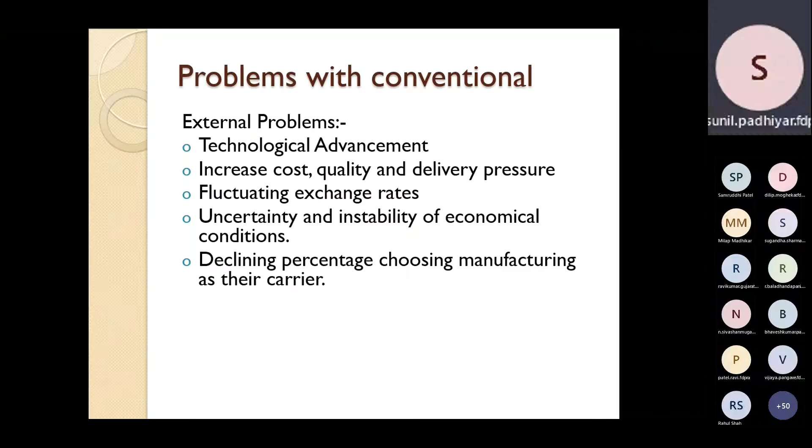Otherwise, no new players are entering. In older days, before 50 or 60 years, you had not heard about Ambani, but he came into the picture, and that number is very big before the 50, 60 years.

Nowadays, you will find a very less number of entrepreneurs or manufacturers. Some internal problems are also there for the conventional manufacturing systems, like the high level of work in process inventories. So inventories will be high, and that will increase the cost, right?

Complex material flow pattern, right? To meet the demand, you have to go for a material flow pattern that is complex. Extremely long lead time - lead time will be higher. Increasing the product complexity - nowadays you require more products, more complex products, having harder materials and complex features. So these are the internal problems for conventional manufacturing.

Excessive material handling and damaged parts - whenever you go for excessive material handling, sometimes it will cause damage to the parts and components also. So that will increase the cost of manufacturing indirectly.

Complex scheduling and machine capacity loading is also there in case of conventional manufacturing processes. Some more are there - low capital asset utilization, aging capital investment, inadequate tooling, unavailable toolings, and out of control scrap and rework cost.

So these are the very large things that create problems, either internally or externally, for the conventional manufacturing system. Now that leads the researchers and manufacturers to think about new technologies.

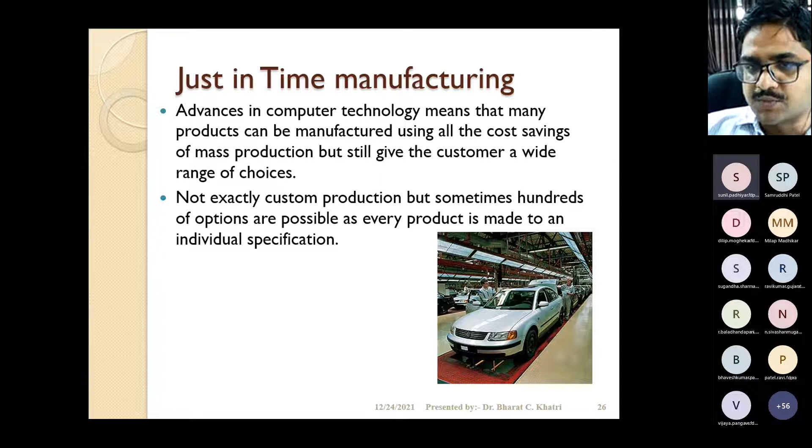So not exactly custom production, but sometimes hundreds of options are possible. Every product is made to individual specifications, and that can be done in the production line or layout within a short time. As the customer will say 'I require this one', this just-in-time manufacturing system will start the manufacturing and provide the product to the customer. So that is a feature of just-in-time manufacturing.

So that is possible without wasting time. You don't require a very large lead time to organize things or to plan things. This technology is capable enough to produce things within a short lead time, right?

And that is possible only due to the shared information system between the manufacturer and individual component and material suppliers, and external supplier partnership. So they will plan in such a way that every inventory, every tooling will be available on the software within a short time.

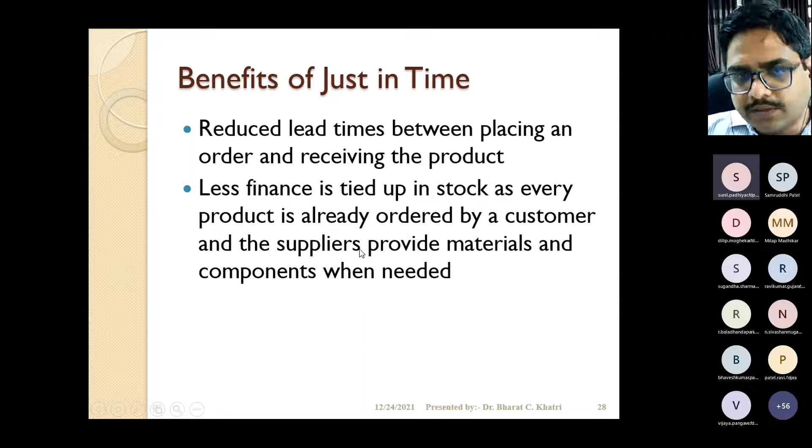Benefit of just-in-time will be very reduced lead times - already we have seen, between placing the order and receiving the product. Less finance is tied up in stocks, so we require very low inventory, as we plan for production after receiving the customer needs. So just-in-time will reduce the inventory also.

Second one is lean manufacturing - that is also a new technology. It is an initiative focused on eliminating all waste in the manufacturing process, resulting in a more competitive and profitable position in the industry.

Lean manufacturing is focused on how we can reduce or eliminate waste, either during product design or manufacturing the product. That depends on reducing human effort, less stock, less time to develop the product, and less space to make that product. So here everything will be customized, everything will be optimized, and we try to reduce all these things, right?

So what are the inputs you are using for making a product that are used in this lean manufacturing system? So that will become more efficient and economical.

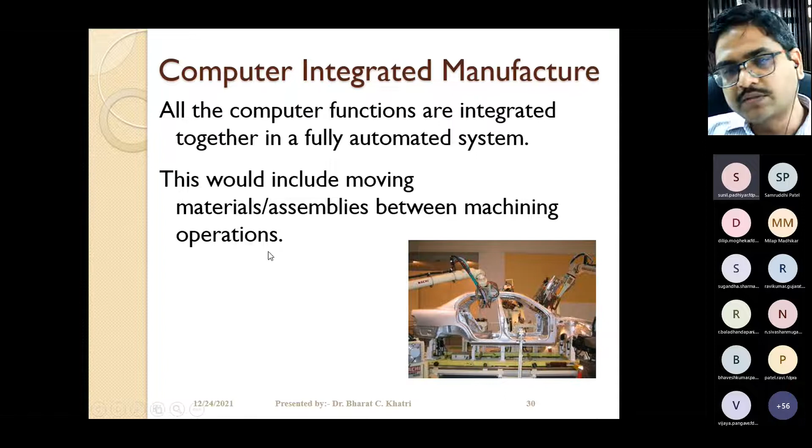Third one, that is computer integrated manufacturing, or CIM. As discussed earlier, this CIM platform will group and coordinate the CAD computer-aided design features, computer-aided manufacturing features, and computer-aided process planning features. All platforms come on a single plane, expediting the work and providing you the best product. This also involves moving material and assembly between machining operations, which this plan also focuses on, so that everything is fully automated.

The next aspect is green manufacturing. Here we not only minimize waste but also minimize pollution, so this aspect is more concerned about pollution, achieved through product and process design. So how we can design such a product or process that creates very little pollution. This is a philosophy rather than an adopted process or standard. It is a philosophy, and some manufacturers are supporting this as well.

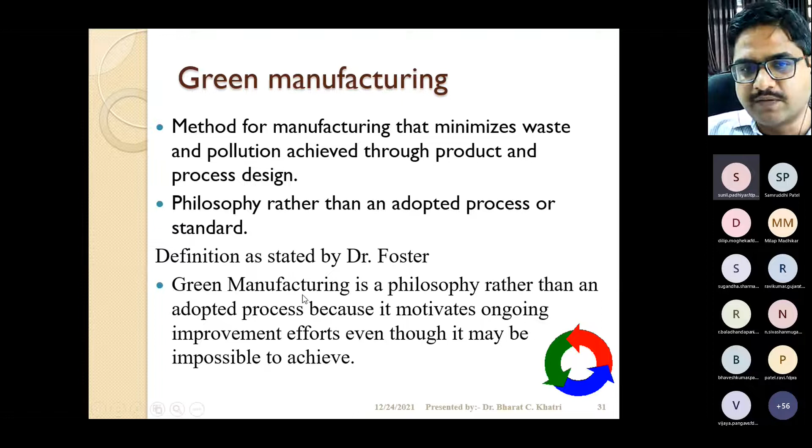Its definition is given by Dr. Foster: green manufacturing is a philosophy rather than an adopted process, because it motivates ongoing improvement even though it may be impossible to achieve. This is the definition given for green manufacturing by Dr. Foster. Now, today's discussion is on the flexible manufacturing system.

What is a flexible manufacturing system? You can say it is a reprogrammable manufacturing system capable of producing a variety of products automatically. The key point is that it is reprogrammable, so it is not a fixed program; you can reprogram the manufacturing system to be capable of producing a variety of products. The second thing is that a variety of products can be produced, and the third important thing is that it is automatic. So here we have reprogrammable, variety of products, and automatic. This allows for reprogramming of products as well as automation.

Conventional manufacturing systems have some limitations, as we already discussed: either you go for less quantity but at high cost, or you go for large quantity but it is not flexible for different types of components. All these limitations can be covered by the FMS system. FMS is designed to provide both of these features; you can go for medium volume in FMS very easily, getting a variety of products along with the quantity.

So why do we need flexibility in the manufacturing system? The reason is variety in products gives more options for customers. You can produce a number of products, giving better options for consumers, and you will get more customers. It also helps in optimizing manufacturing cycle times, reducing production cost, and overcoming internal changes like failures, breakdowns, and limited resources. These can all be overcome with the flexible manufacturing system. External changes, such as changes in product design and production system, are very easily met by the FMS, flexible manufacturing system.

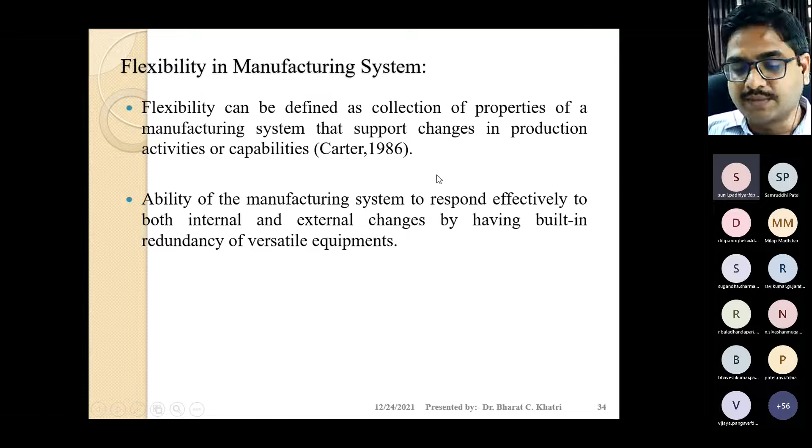Regarding the history of FMS, it started in 1960 in England by David Williamson. He thought in terms of a flexible manufacturing system by making the system called System 24. So he gave the name System 24, not FMS, but introduced it as System 24. He designed such a flexible manufacturing system that could operate without a human operator 24 hours a day under computer control. In 1960, he used CNC machines, NC machines, and computers to start that system and run it 24/7. At that time, he introduced the terminology FMS.

From the beginning, the emphasis was on automation rather than reorganizing the workflow. So in FMS, the total focus is on automation. Automation is the main purpose in the beginning, so FMS is basically based on automation.

During 1960 to 1970, cost was the primary concern. We all know that at the time the cheaper product was required more. Then later, quality became the priority.

From 1970 to 1990, we focus on quality. We wait for the quality, we wait for the market to get a quality product like a Bajaj scooter. We can wait for the delivery time, large delivery time, but after 1990, people are not that much patient. So after that, the market becomes more and more complex, and speed of delivery becomes the focus point for the customer.

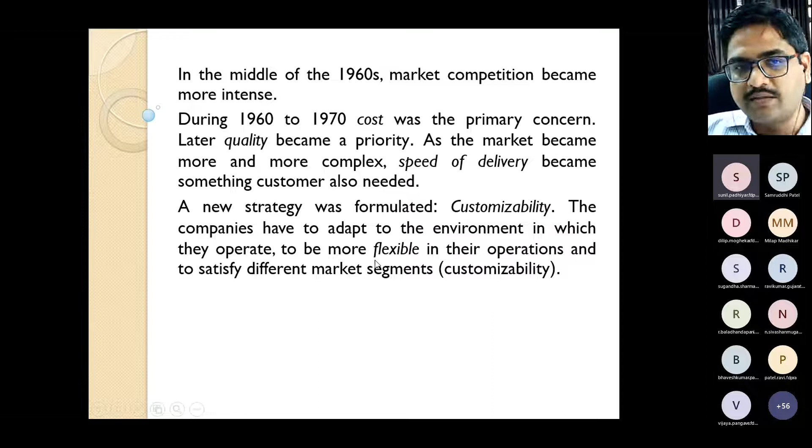So customers are also focused on how much speedy delivery you can do. So a new strategy was formulated: customizability, and companies have to adapt to the environment in which they operate, to be more flexible in their operations and satisfy different market segments. So FMS is a manufacturing technology, you can say.

It is a philosophy also, you can say, and system is a keyword. We have to focus on the system. We have to develop such a system that is flexible. And the buzzword for today's manufacturer is agility.

Agile manufacturer is one who is fastest to the market, operates with the lowest total cost, has the greatest ability to delight its customer. So agility is more of a focus point nowadays, that we require to give the product at low cost in a very delightful manner.

FMS is simply one way that manufacturers are able to achieve this agility.

FMS, as per the US government, the definition for FMS is very simple in that case: a series of automatic machine tools or items of fabrication equipment linked together with an automatic material handling system. So the number of automatic machine tools linked together with an automatic material handling system, and a common digital pre-programmed computer control. So all things like the number of machine tools and the conveyor belts should be connected with the common digital platform. So that will cause the producing of the product very easily. So that is the definition given by the US government.

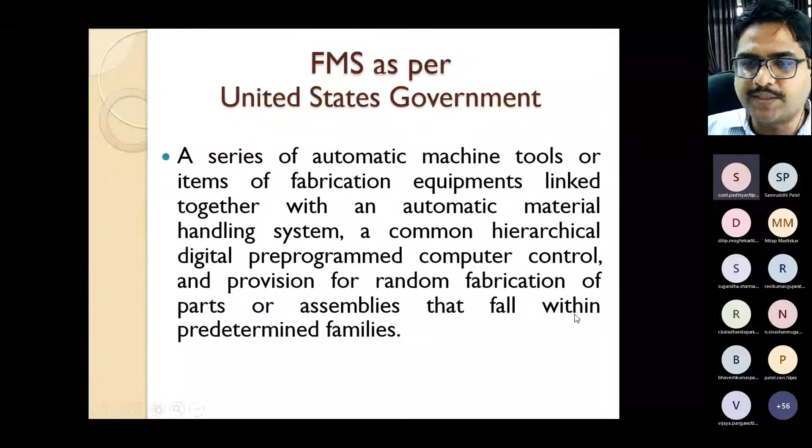Likewise, FMS by Kearney and Trecker: FMS is a group of NC machine tools that can be randomly processed, a group of parts having automated material handling, and a central computer to control dynamically balanced resource utilization, so that the system can adapt automatically to change in the part production mix or level of output. So that will provide the flexibility for changing the part production.

So many definitions are there. Now you can see the layout for the FMS. Here you can see on the top side that is a computer control automation. You can say that is the major thing.

Number of machine tools are there around the conveyor belt, centrally. Here the raw materials are taken and that will go on the conveyor belt and process one by one on the machine tools, and finally you will get finished products that will be stored in the storage place. So this way you can process the raw materials centrally, and all machineries, all conveyor belts, all storage and retrieval systems are connected to a common computer center. So one person can be capable enough to run the whole system, and this system is so adaptable and so flexible that it can go for a change in the product easily.

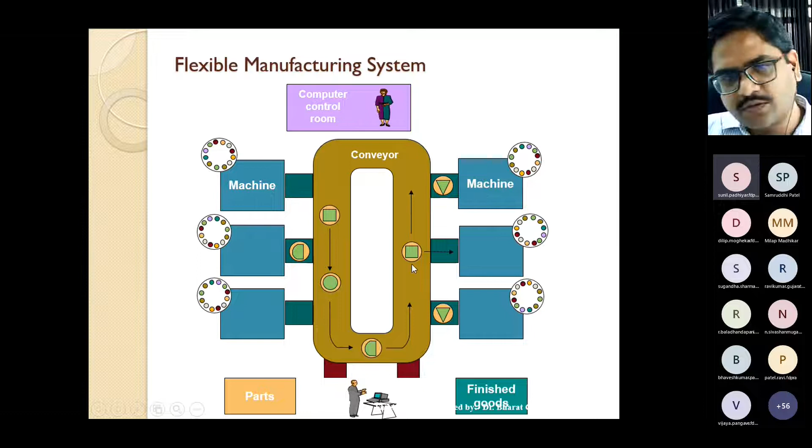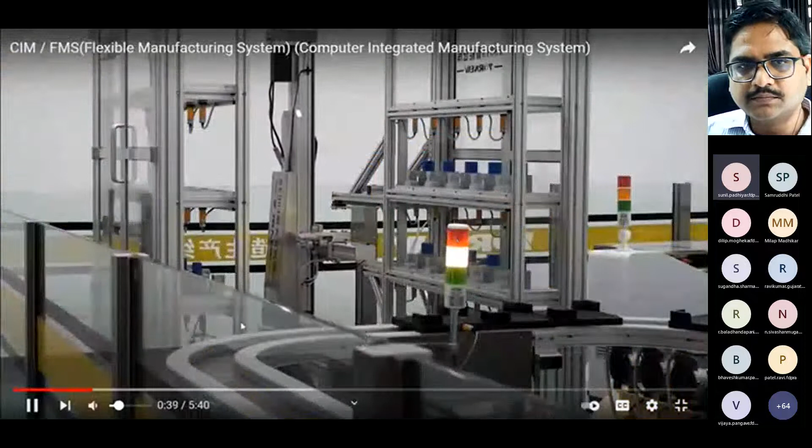All material handling will be automatic. All manufacturing will be automatic. All assembly stations are also automatic. All inspection stations, here you can see, will inspect, that is also automatic. Here it is placed, it will sense that a component is placed, then after it will move automatically.

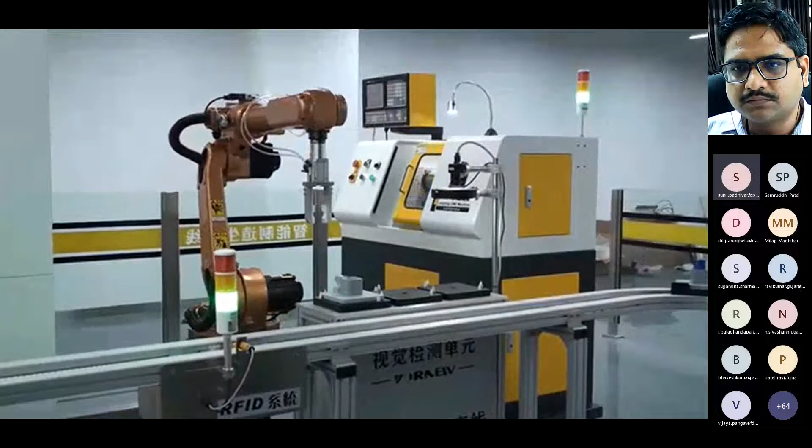One major thing is that all these robots, CNC machines, storage systems, and retrieval systems are connected to a single PC. So one single program gives command to the robot, gives command to the CNC machine, gives command to the pallet unit, giving synchronized operation, right?

It gives command after the finishing of the component in the machines to the robot that machining is completed. You can pick the component from the machine tools and place it on the conveyor belt. So all these signals are given by the single computer. That is the beauty.

Here you can see that it is placing the semi-finished product onto the next machine tool.

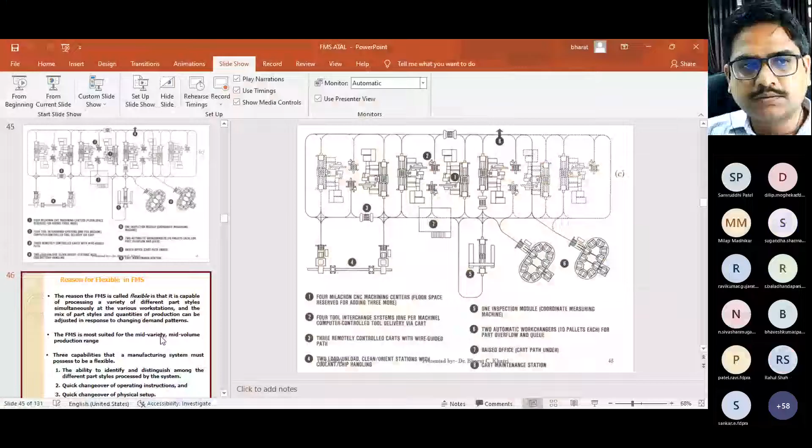So here, these are the reasons for flexibility. The reason FMS is called flexible is that it is capable of processing a variety of different part styles at various workstations. Also, it produces mixed part styles. Quantity of production can also be changed, so it can change both the quantity and quality of production. FMS is most suited for the mid variety, mid volume production range, right?

There are three capabilities that a manufacturing system must possess to be flexible. To whom will we call this a flexible manufacturing system? It should have three capabilities. One is the ability to identify and distinguish among different part styles processed by the system, quick changeover of operating instructions, and quick changeover of physical setup. These are the things needed to call the system flexible.

Need of FMS - why do we need this FMS? We want to reduce the setup and queue times. We want to improve efficiency. We want to reduce the time for product completion. We want to utilize the human worker better. We don't want to use the human worker to pick and place things around the machinery.

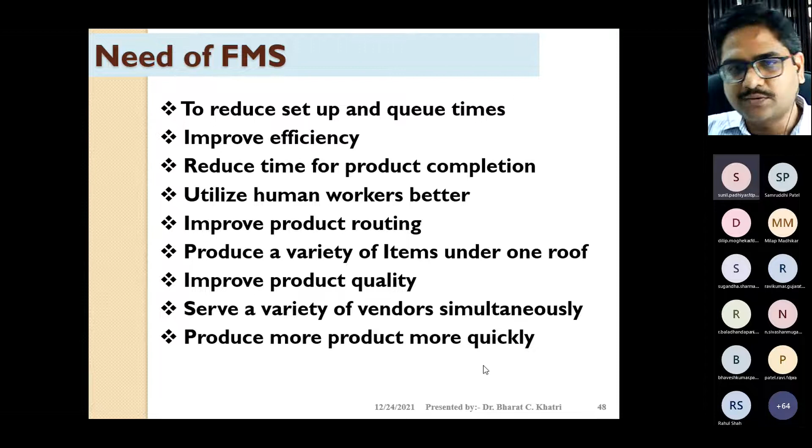The principal objectives of FMS are very simple: to improve operational control through the reduction in the number of uncontrollable variables, and reducing the dependency on human communications. Where we don't require communication by human beings, it can be done only by the computers.

Reduce the direct labor, removing the operator from the machining sites since the computer will do the work. Dependency on the highly skilled machinist is eliminated. We don't require a CNC programmer to enter the program in the machine tools; the computer directly takes the software, makes the program, and feeds it to the CNC machine. Unattended or lightly attended machine operations can be done with FMS.

The third objective is to improve short-run responsiveness. This helps with engineering changes and processing changes; machine downtime will be reduced, and cutting tool failure will be reduced. These are the things you can get from FMS.

Improve the long-run accommodation through quicker and easier acceleration of changing product volume. New product addition and introduction can be done in FMS, along with different part mixes. You can reduce inventory by reducing lot size, improving inventory turnovers, and planning for JIT, just-in-time manufacturing, in FMS as well.

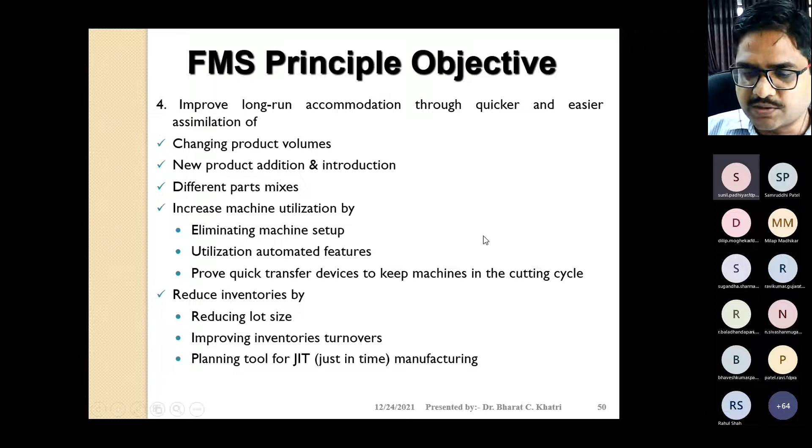We have already discussed what flexibility is. Flexibility means to produce reasonably priced, customized products of high quality that can be quickly delivered to customers. So we want to produce customer-focused products at a lower cost. The system is such that it can adopt changes whatever the customer requires. That is the flexibility given in manufacturing.

Flexibility in manufacturing means the ability to deal with slightly or greatly mixed parts, allowing variation in part assemblies and variation in the process sequence. There are different types of flexibility defined in FMS. We'll see them one by one.

The first one is machine flexibility: the capability to adapt a given machine in the system to a wide range of production operations and part types. The machine is capable of supporting a range of production operations and part types. The greater the range of operations and part types, the greater the machine flexibility. So we have to purchase a machine with more machine flexibility.

There are various factors on which machine flexibility depends. One is the setup and changeover time. The second is the ease with which part programs can be downloaded to the machine, meaning how easily you can insert the part program into the machines. These two things govern the machine flexibility.

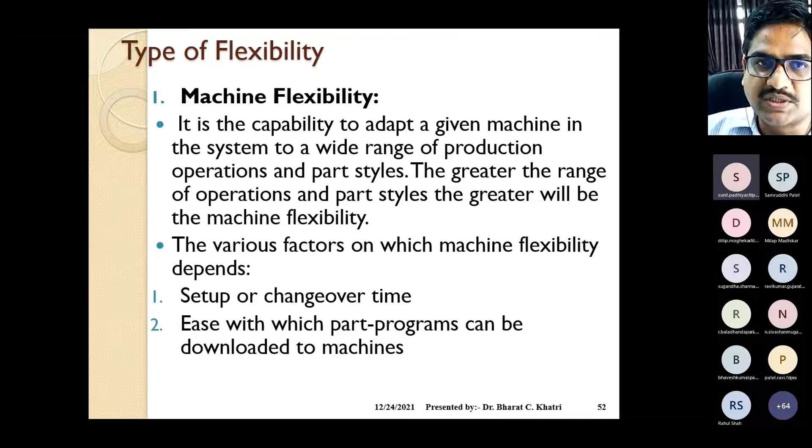The second one is production flexibility: the range of part styles that can be produced on a system. It is for the whole system, not a single machine—how many part styles can be produced. The range of part styles that can be produced by the manufacturing system at moderate cost and less time is determined by the process envelope, and production flexibility depends on the machine flexibility of individual stations and the range of machine flexibility across all stations in the system. So indirectly it depends on machine flexibility.

The third one is mixed flexibility: the ability to change the product mix while maintaining the same total production quantity. We want to maintain the same production quantity, but the variety of products will differ. This is also known as process flexibility. It depends on the similarity of parts in the mix factor, on machine flexibility factors, and on the relative work content time of the products produced. These are the factors which decide mixed flexibility.

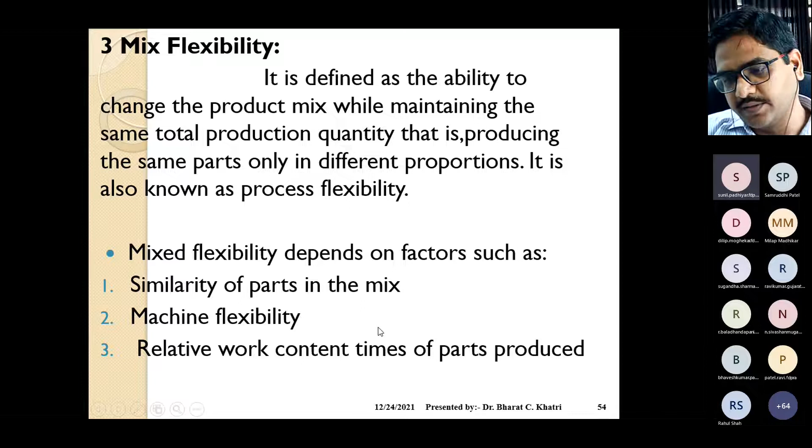The fourth one is product flexibility. It refers to the ability to change over to a new set of products.

Economically and quickly responding to change in market requirements means changing the whole product, not just a component. How fast you can change that product decides the product flexibility. There are several factors that decide this, depending on the number of products. The first is the relatedness of a new product design with the existing part family.

The second factor is offline part programming preparation, and the third is machine flexibility.

Routing flexibility is the capacity to produce a part on an alternative workstation in case of equipment breakdown, tool failure, or other intervention at a particular station. Sometimes one machine or workstation fails, so you need to change the route and bypass that machine. How easily your system can bypass or change the routing is known as routing flexibility.

It depends on various factors. The first is similarity of parts in the mix, second is similarity of the workstation, and third is common tooling—how much common tooling and similar workstations you have.

The sixth one is volume flexibility. It is the ability of the system to vary the production volume of different products to accommodate changes in demand while remaining profitable. For example, product A has 50 units, product B has 1000 units, product C has 500 units. How easily can you change the number of products? Can you raise A from 50 to 500 easily? That is volume flexibility.

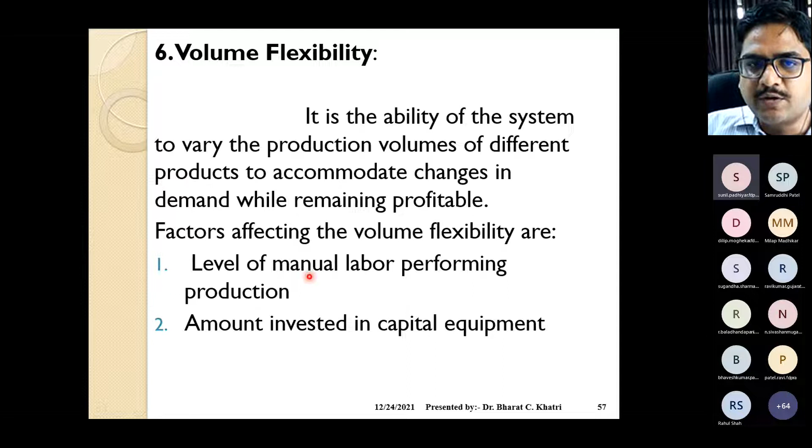This depends on various factors: the level of manual labor performing production, and the amount invested in capital equipment.

The seventh and last flexibility is expansion flexibility. It is defined as the ease with which the system can be expanded to foster total production volume. We have a fixed production volume of 500 or 1000—how fast can you change from 500 to 1000? That is expansion flexibility, depending on how much space and capital budget you have. There are many factors that decide this.

Here, three factors are listed. One is the cost incurred in adding new workstations and training workers. Second is easiness in expansion of the layout—how easily you can expand it. The third is the type of part handling system you have. So this depends on cost, layout, and the handling system.

Now, tests of flexibility. To qualify as flexible, a manufacturing system should satisfy several criteria. There are four criteria tests. After passing these four tests, we can say the system has flexibility.

The first criteria test is the part variety test: can the system process different part styles in non-batch mode? That is the first test it has to pass.

The second is the schedule change test: can the system rapidly or readily accept changes in the production schedule, either in part mix or production quantity? It has to pass changes in schedule, mix, and quantity.

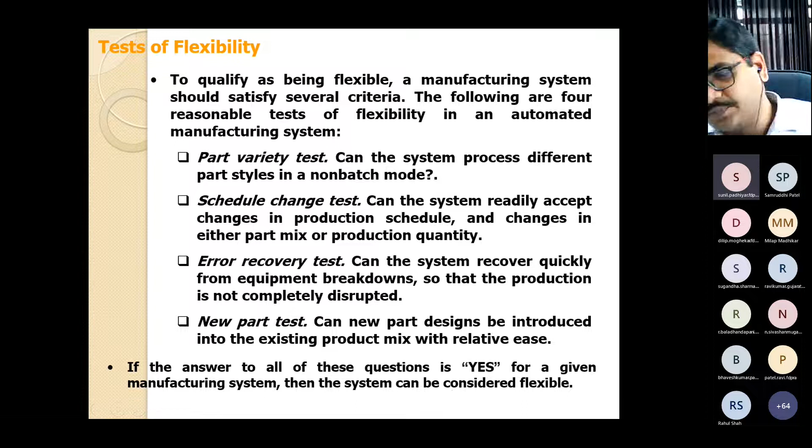Based on this flexibility, they have defined different types of FMS. In the first category, the first type is a sequential FMS, where it manufactures one part based type, and then planning and preparation is carried out for the next part based type to be manufactured. It operates like a small batch.

So flexible transfer line. The second one is a random shift FMS - randomly it will go for the random mix of the parts. The third one is known as dedicated FMS. It is continuously manufactured for an extended period for the same but limited mix of the piece part based type.

Engineered FMS manufactures the same mix of part types throughout the lifetime - that same part mix will not change. Modular FMS: a modular FMS with a sophisticated FMS host enables an FMS user to expand FMS capability in a stepwise fashion into any of the previous four types - either sequential, random, dedicated, or engineered FMS.

Depending on the kinds of operation, FMS are also defined: one is processing operation, one is assembly operation. In processing operation, such operation transforms the work material from one state to another, moving towards the final desired part product. It adds value by changing the geometry, property, or appearance of a starting material.

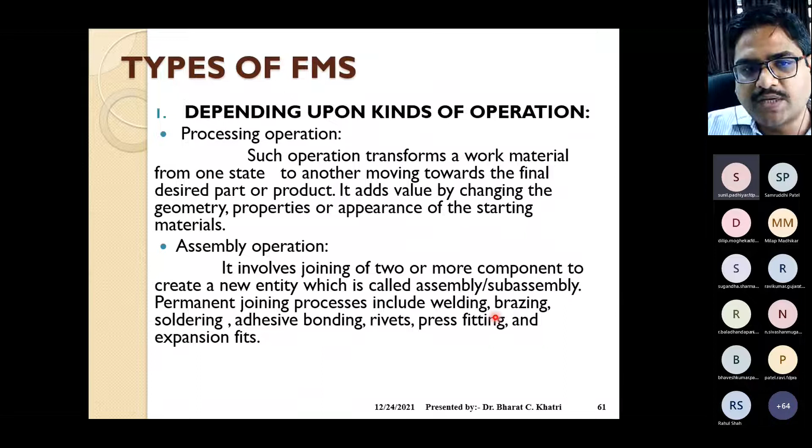Assembly operation FMS is where it will join two or more components only. It will not change the shape of the component, will not change the dimension, and will not remove material from the component. It covers joining processes like welding, brazing, bonding, riveting, and press fittings. That is the second type of FMS.

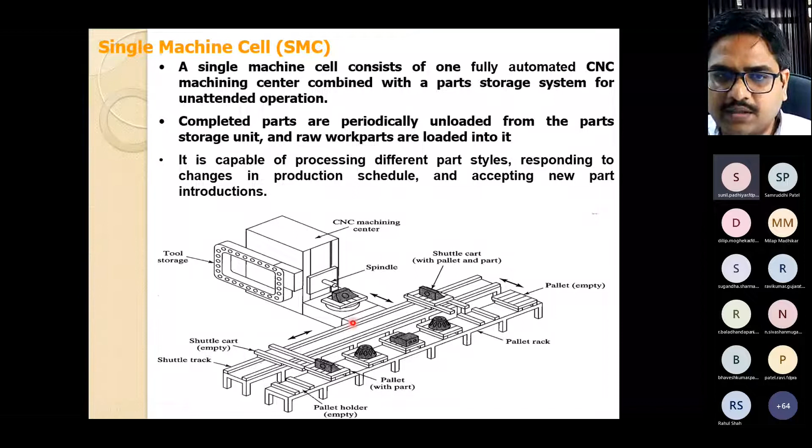Here you can see there is only one single dedicated CNC machine. It processes the component throughout - it will take raw materials and complete the whole operation using a single CNC machine. There is a tool storage that uses different types of tools to process the components, and there is only one dedicated pallet rack or conveyor rack that supplies raw material to the machine and carries away the finished goods to the storage place. So it has only a single machine tool.

Flexible manufacturing cells consist of 2 or 3 processing workstations. Here you can see the first, second, or third workstation, that is a CNC workstation, plus a part handling system which will load and unload things from the stations. It will take up raw material from the stations and put it in the CNC machines, and thereafter pass it through to the next machine. So it has a limited number of machine tools.

One is a flexible manufacturing system, the whole system, where you will find a number of machine tools, centralized conveyor belts, automatic storage and retrieval systems, robots, and inspection units. Where 4 or more processing workstations are connected mechanically by a common part handling system and electronically by a distributed computer system, it is known as FMS. Here you can see 4 or more workstations which are interconnected and also supervised by the central computer.

Difference between FMS and FMC - flexible machine cells and flexible manufacturing system. What is the difference? First, FMS has 4 and more systems while FMC has 2 or 3 machines. FMS is a large and more sophisticated computer control system, while FMC has a simple computer system.

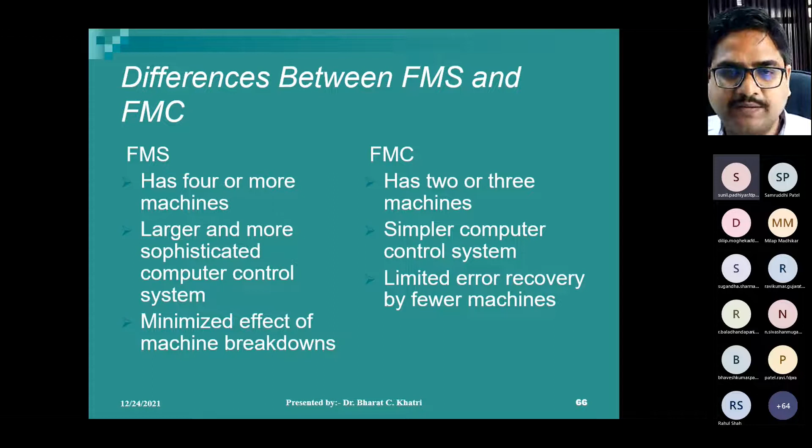FMS minimizes the effect of machine breakdown since there are larger numbers of similar machines. So if one machine breaks down, you can bypass that route and continue production. But in FMC, you cannot do that.

We already discussed dedicated and random order FMS. The random order FMS has more part variety and less volume, while dedicated FMS has higher volume but less variety.

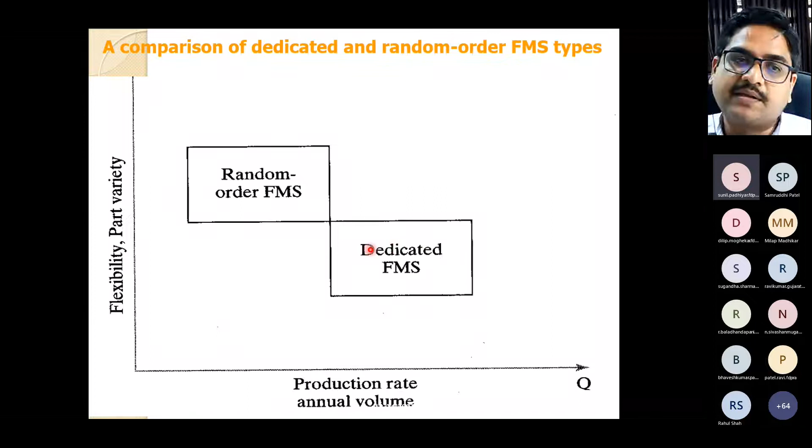Now more consideration will be given to FMS layout. You have to plan your layout such that the whole system becomes flexible, giving flexibility to the system. So layout is a very important design characteristic of FMS design, and we have to focus on it.

The layout of machines to process parts in FMS is determined by the type of material handling you are using. Based on the type of layout, FMS is also classified, so there are different types of FMS layouts available.

The first one is the inline layout, where automatic machines are arranged in the same line, one by one, and work flows in a linear manner. Machines and handling systems are arranged in a straight line.

The loading station takes the raw materials, which are passed to the machines one after another in sequence, and the completely finished product goes onto the unloading pallet and then to storage pallets.

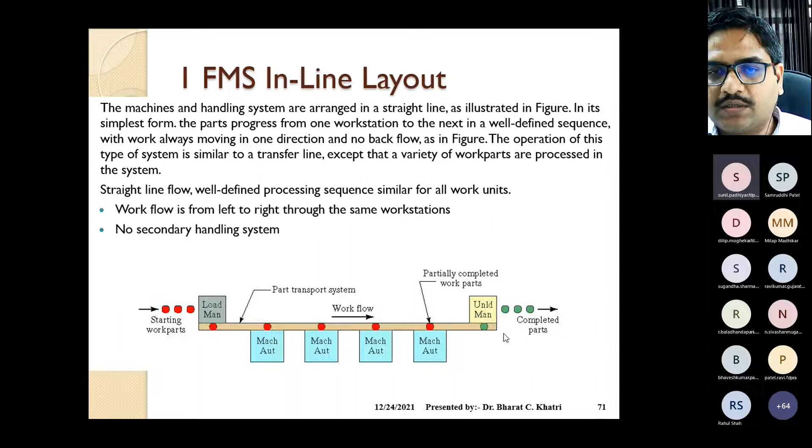The straight line flow has a well-defined processing sequence similar for all work units. Workflow is from left to right through the same workstations. No secondary handling system is present, only a single primary handling system.

The second one is the FMS loop layout. In this case, machines are laid down around a central conveyor belt in an oval shape. This belt continuously moves, providing parts from the loading and unloading stations to the various machines in the loop.

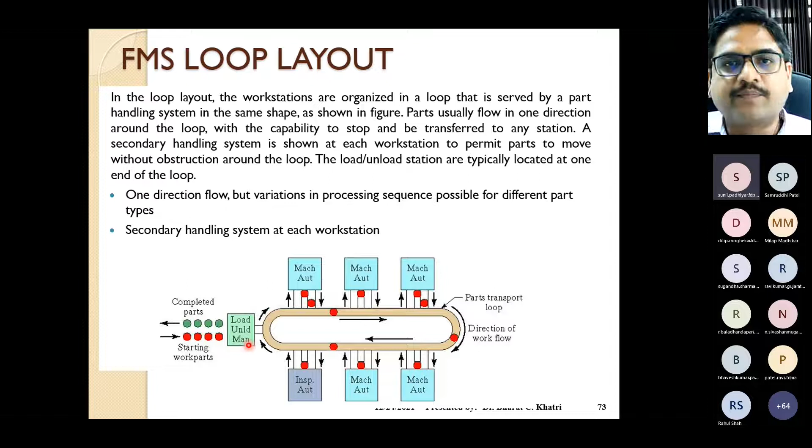Each machine itself has a secondary handling system around it, so you'll find a secondary handling system near each machine along with a central common conveyor belt. So a center material handling system is present in the FMS loop layout.

So that is arranged in the rectangle layout set. Some more layouts are there.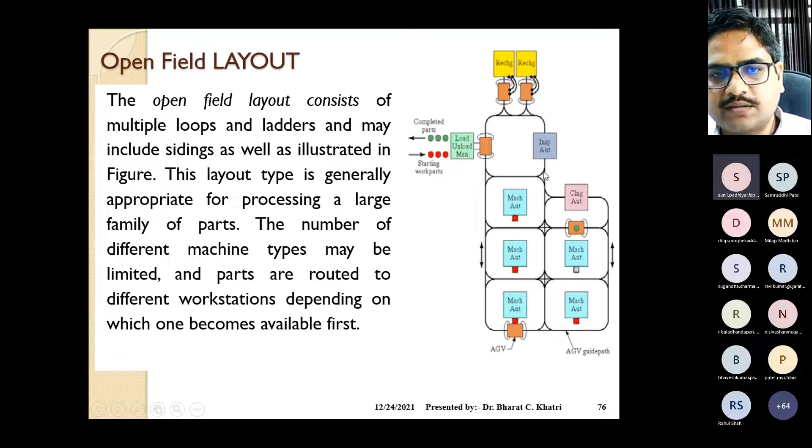Open field layout. This is a combination of the ladder layout and multiple loops. You can see a number of machines in the central block that allow the flow of the workpiece around the machines, and due to that it will complete the task. This is a different type of layout where the AGV is used to move the material.

These are the different layouts.

There are some factors that will influence the FMS layout, such as availability of raw material, proximity to the market, transportation facility availability, availability of efficient and cheap labor, availability of power, water and fuel. Based on this, the FMS layout will change. Business and economic conditions also matter—depending on these, you may opt for a more complex layout.

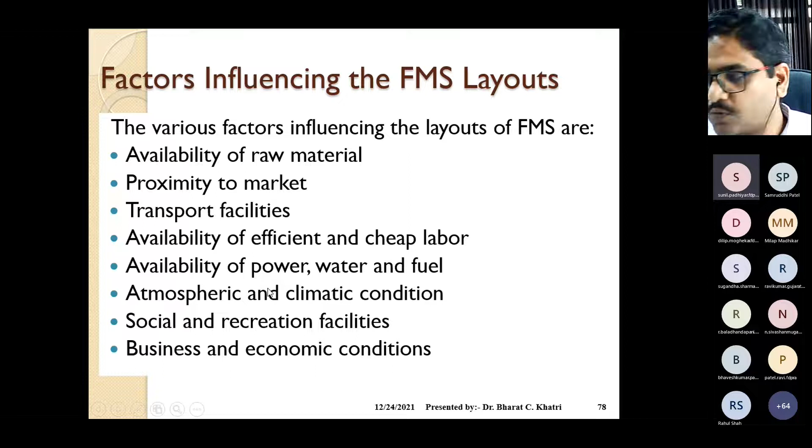Before going to the components, I will show you one more video related to FMS and the production of real items using the FMS. Please wait.

It is a very small video. It will show how real products are made with the help of the FMS. Just let me share the video. Please wait.

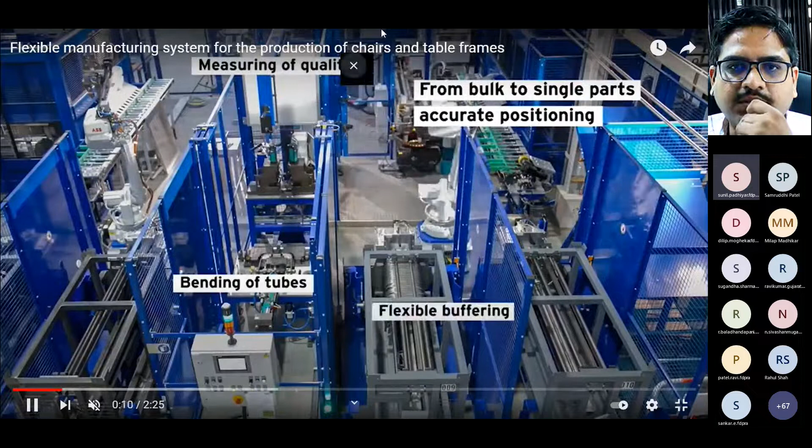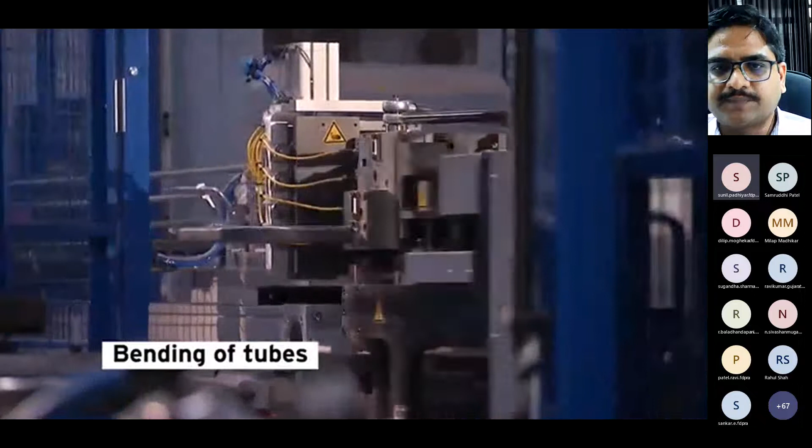This is a video showing how they're making chairs. Here you can see the robots working centrally, placing the tubes used for making the frame of the chair. They are bending the tubes as per the requirements. Various machineries are used for making the complete finished product, bending the tubes to make the frames.

No human being is found in this entire FMS system—it is totally automatic and controlled by a single central computer. You don't have to go from one machine to another to enter programs and do other things. In a CNC machine, we enter the program in one machine and then take the component from that machine, but here the central computer will feed the program to each machine.

So here the laser cutting is done, and the operations get the signal from the central computer. Some workers are there to supervise, but in a very limited number. Here the arc welding is done—there's a lot of things they are doing, bending the tubes and welding the tubes.

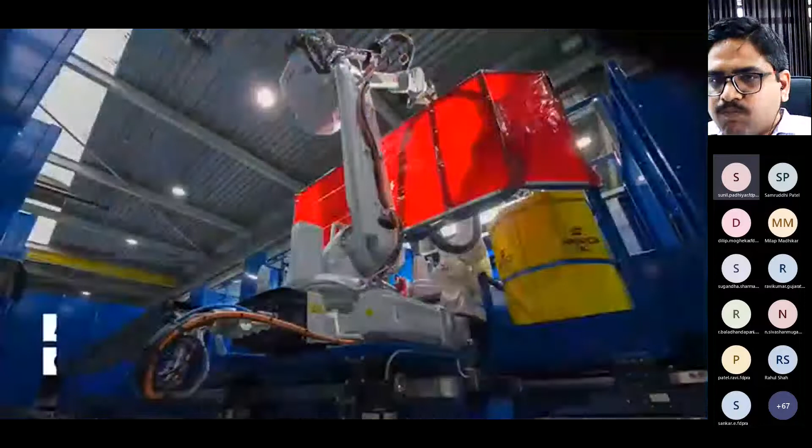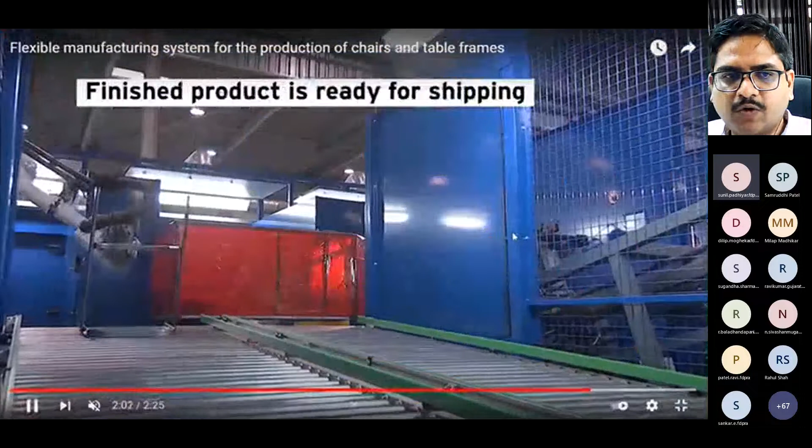Continuously the robot is picking and placing the things, so a continuous automatic material handling system is there. You can find here the finished product, that is a frame for the chair. This is a frame from the chair, so that is built in the FMS.

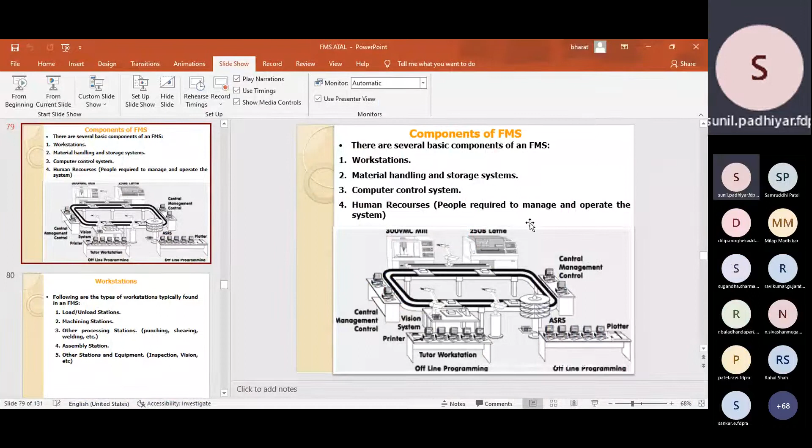So FMS is having automatic machine tools with automatic material handling system. So for making the FMS, we require a variety of components.

These are the four major components. One is your workstation, second one is your material handling and storage system, third one is a computer control system, and the fourth one is human resource. We'll see one by one.

What is a workstation? Workstation, you can say typically a load-unload station. Machining station like the CNC machine tools, like a turning center, milling center, that type of machine tools are there. Other processing station like punching, shearing, welding station, you can say.

Assembly station, also some place where you are doing the assembly, so that is assembly station. Workstation may also be having an inspection vision system, like a provision for vision inspection. So this is a workstation which will cover 3 or 4 things. Not only the loading and unloading, it will also go for machining, welding, joining, assembly, and inspection. So all those things are covered in the workstation field.

Second one is material handling system and storage system. That is a big task to be done automatically in the FMS. So the function of the handling system is the independent movement of the work part between the stations. We require independent movement from one workstation to the other workstation. It has to handle a variety of work part configurations, different types like spherical, round, or rectangular box shape, different configuration work parts to be handled by this handling system station.

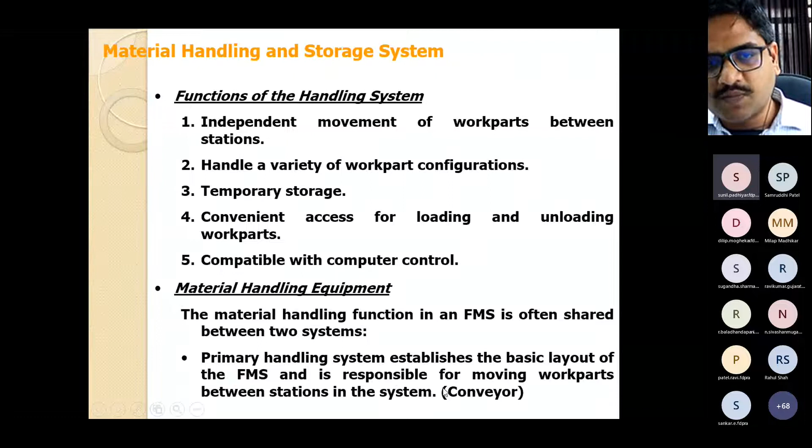Material handling equipment can have primary handling systems that establish the basic layout of the FMS, as we have seen earlier. It is responsible for moving work parts between stations in the system by using the conveyor belt. Secondary handling system consists of the transfer device and automatic pallet changing. We have seen a lot of pallets moving empty and with the workpiece in the earlier video also.

So the function of the secondary handling system is to transfer work from the primary handling system to the machine tool or other processing station, and to position the part with sufficient accuracy and repeatability to perform the process, assembly, or operations. So it should accurately position the components. That is important for the material handling system.

A lot of material handling systems and automated part handling systems are there. You have seen in the earlier video also the AGV running behind the machineries. There is a conveyor belt, the same conveyor belt you have seen in the airport also, that will move the part from one place to other place. Also, an automatic storage and retrieval system.

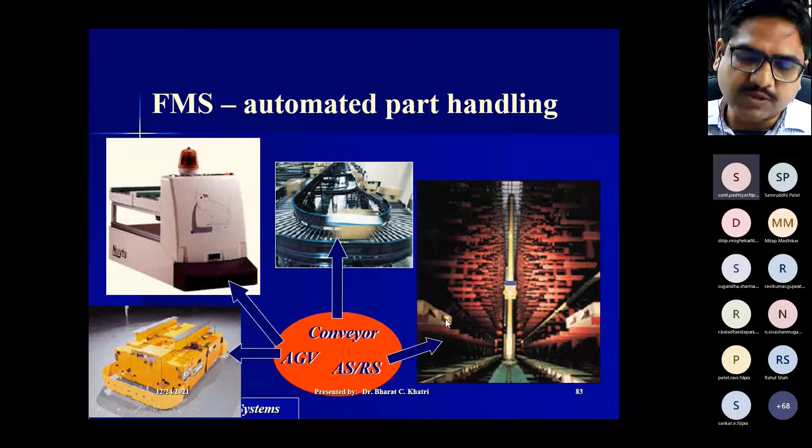There is a rack type system which has some barcodes, where you can store the systems and also retrieve them. So these are the three major units. The conveyors are one unit. AGV, automated guided vehicle, doesn't require a human being to move the material by pulling the cart or something like that, it is automatically guided.

The third one is the automatic storage and retrieval system. It should automatically pick things from the racks and place them automatically in the racks. It should identify the current need, and based on that, the robot should go to that place and pick the things from the rack. So these are the three major things in the automated material handling system.

So the first one is the automated guided vehicle, AGV. AGV is a material handling system that uses independently operated, self-propelled vehicles guided along a defined pathway. The vehicles are powered by onboard batteries that allow many hours of operation between recharging.

A distinguished feature of AGVs compared to rail guided vehicle systems or most conveyor systems is that pathways are unobtrusive. AGV is appropriate where different materials are moved from various load points to various unload points. AGV is therefore suitable for automatic material handling in batch production and mixed model production.

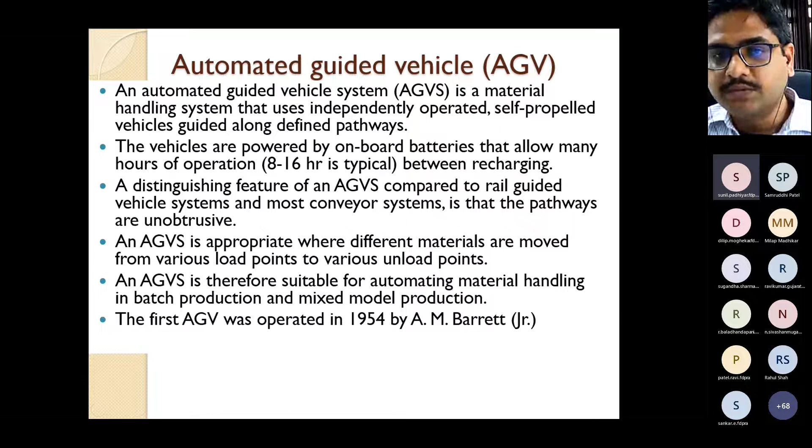The first AGV was operated in 1954 by A.M. Barrett, who designed the first self-propelled vehicle. These self-propelled vehicles, or AGVs, can be divided into three categories: driverless train, pallet truck, and unit load carrier. Let's see each one by one.

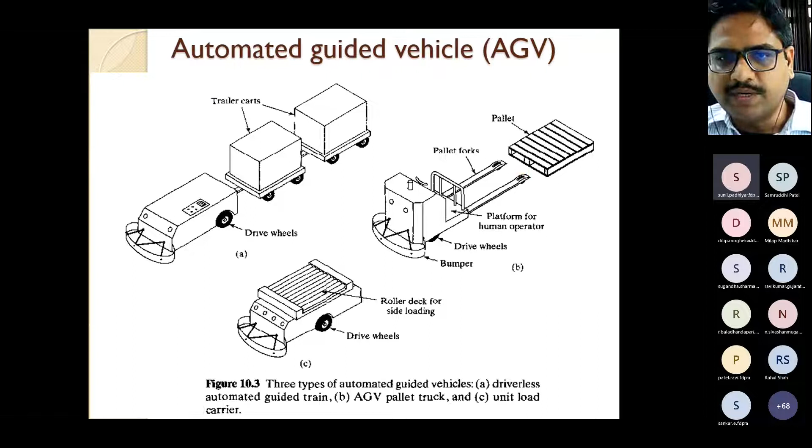Here you can see photographs of the driverless train. This is the driverless train. Second is the AGV pallet truck, where there are no human beings - there's a pallet truck with forks that will lift the pallets. The third one is a unit load carrier, which only loads unit items.

Driverless train consists of towing vehicles that pull one or more trailers to form a train. It was the first type of AGV introduced and is still widely used today. A common application is moving heavy payloads over large distances in warehouses or factories. For a train consisting of 5 trailers, this is an efficient transport system.

Second is the pallet truck, used to move palletized loads. AGV pallet trucks range up to several thousand kilograms, and some trucks are capable of handling 2 pallets rather than 1. A more recent introduction related to the pallet truck is the forklift AGV, which you will find nowadays as well.

The third one is the AGV unit load carrier. It will load unit loads from one station to another station. They are often equipped for automatic loading and unloading of pallets, moving from the assembly line to the machining lines, for example.

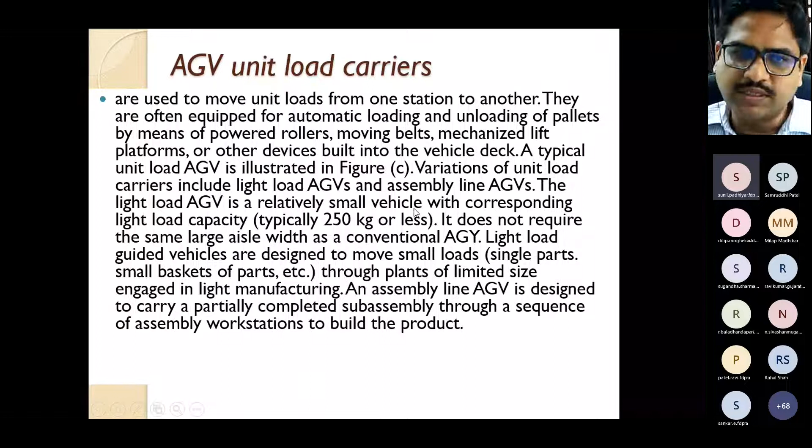Another application area of AGV technology is the flexible manufacturing system. In a typical operation, a work part is started onto a pallet fixture by human workers at the starting area, and the AGV will deliver the part to the individual workstation.

How does the AGV move automatically, how does it guide itself, how does it follow the path automatically? There are 3 technologies used for AGV guidance. One is embedded guide wire.

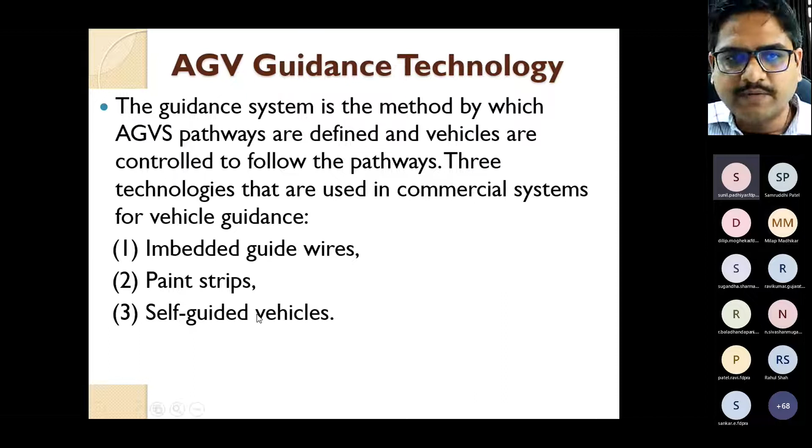On the floor they insert a continuous wire at a very small depth, creating a channel 3 to 12 mm wide and 13 to 26 mm deep, where the wire is inserted. After the guide wire is installed, the channel is filled with cement to eliminate discontinuity in the floor surface, so only the wire remains inside the channel and you get a smooth floor.

The guide wire is connected to a frequency generator, which emits a low voltage, low current signal with a frequency of 1 to 15 kilohertz. This induces a magnetic field around the pathway that can be followed by a sensor on board each vehicle. The sensor follows this magnetic field and moves along this guided pathway. So with this wire technology, the AGV can move automatically inside your plant.

Second, you can paint a strip on your shop floor, and the vehicle uses an optical sensor system capable of tracking that paint. This is a specific fluorescent particle paint, not normal paint, that reflects an ultraviolet light source from the vehicle. One system uses a 1 inch wide paint strip containing fluorescent particles that reflect the ultraviolet light source from the vehicles. The onboard sensor detects the reflected light in the strip, and the control steering mechanism allows it to follow along that paint strip.

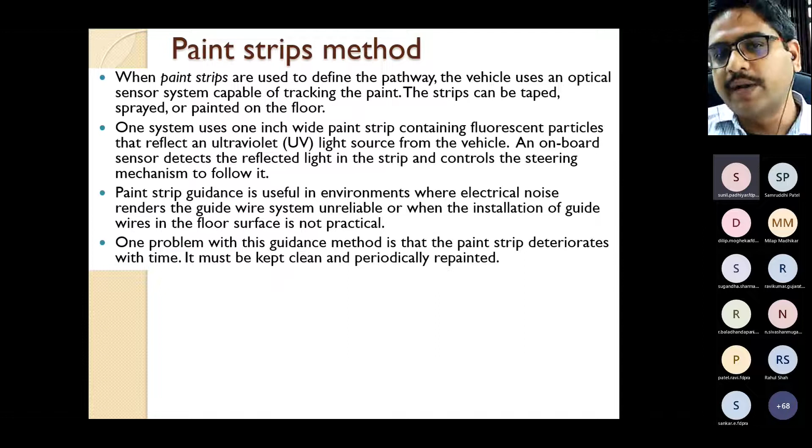The third one is the self-guided vehicle, the latest SGV guidance technology. Unlike the previous two guidance methods, SGVs operate without a continuous defined pathway, so they are self-guided vehicles.

They use a combination of dead reckoning and beacons located throughout the plant, which can be identified by onboard sensors. Dead reckoning refers to the capability of the vehicle to follow a given route in the absence of a defined pathway. Movement of the vehicle along the route is accomplished by computing the required number of wheel rotations in a sequence of specified steering angles.

That is based on calculating how many turns the wheel has made. Based on how much distance it has covered, you can move from one place to another instead of using paint or wire. So here you require computation on the vehicle, meaning an onboard computer on the vehicle.

There are various types of beacons also used in commercial SGVs. One system uses barcode beacons mounted along the walkway. So barcodes, or QR codes, are also used to identify the parts.

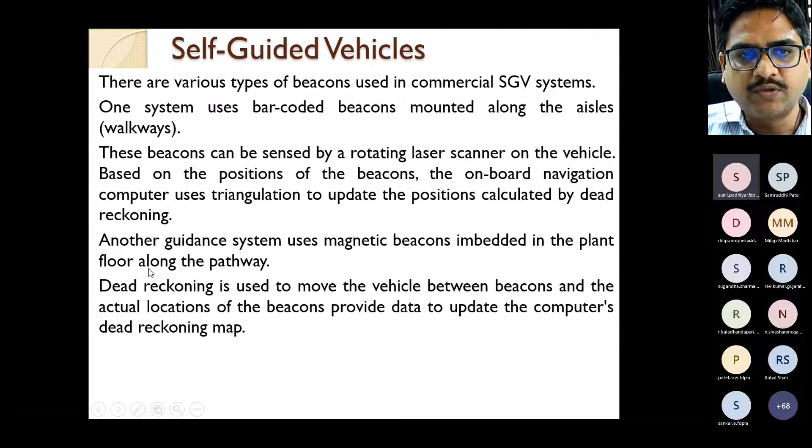The advantage of self-guided vehicle technology over the fixed path is its flexibility. In the fixed path, there is no flexibility; the vehicle only follows the path. But with a self-guided vehicle, you can go anywhere, change the route easily, and make major alterations without any problem.

There are some difficulties and things we have to focus on whenever we go for AGVs. For better operational safety, you require control of traffic. If you are using more than two AGVs, say 4 or 5, you need to manage interference between the AGVs and other components, to prevent interference, accidents, or collisions.

You have to work this out. Two methods of traffic control are used: onboard vehicle sensing and zone control. These two technologies can be used to prevent collisions.

Vehicle dispatching, that is, which vehicle has to go and take the components, also has to be controlled. Safety should also be taken care of, as so many workers or human beings are there in the plant for supervising things. The AGV should not strike or collide with human beings. So these three things: traffic control, how you dispatch the vehicles, and how you ensure the safety of human beings, that you have to think about.

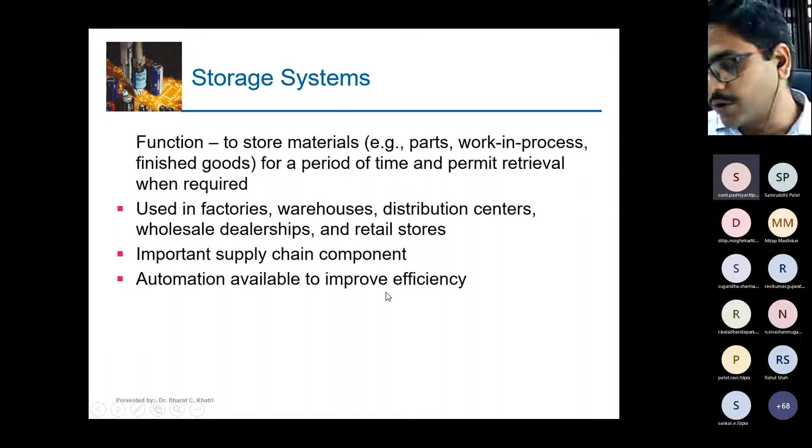So what type of materials should be stored? Here is a list of the materials. You can see one by one what type of things you require to be stored.

First, raw material, purchased parts, like casting. Work in process, semi-finished goods you place. Finished products ready for shipment. Rework or scrap, you have to put in an identified place. Refuse, toolings, different tools, cutting tools, jig fixtures go in a particular place so that whenever machine tools require them, they are easily available. Spare parts, office supplies like paper forms, plant records, all should be stored in a well-organized manner.

The performance measure for the storage system, how you can measure the performance. The first thing is storage capacity. Two measures are there: total volumetric space, how much volume is there, and total number of storage compartments.

That's unit load. By these two measures you can find out storage capacity based on volume or number. Storage density is the volumetric space available for storage related to the total volumetric space in the facility. Accessibility is how easily you can access every corner of the space. System throughput is the hourly rate of storage and retrieval transactions, how easily you can store and retrieve things. Utilization and availability are the five criteria for defining the performance measure of the storage system.

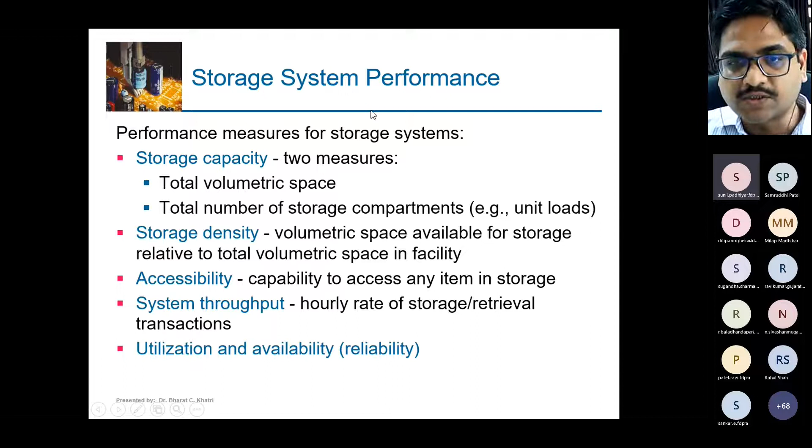Sometimes you can categorize storage in two manners: randomized storage and dedicated storage. In randomized storage, incoming items are stored in any available location when there is a big warehouse and very limited travel, meaning usually the nearest available open location is used. In dedicated storage, you use a predefined specific location for storing different equipment or items. The typical basis for a dedicated location is item number sequence, activity level, or activity space ratio, and depending on that you decide the dedicated location.

Sometimes storage can be of different types. One is bulk storage, when you want to store in bulk manner with very high density possible, low accessibility required, and lowest possible cost per square foot required, then you go for bulk storage. For example, your sand can be put in one big corner, you can put a whole truck of sand there - that is bulk storage.

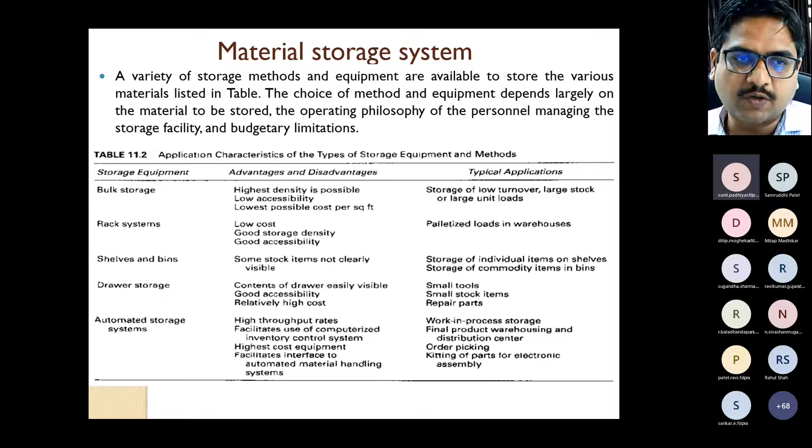Rack system: you put the things in racks, you have to provide racks in your workspace and make racks for that. Shelves, cupboards, that cupboard element also you can do. Drawer storage, you can use different drawers to store things. And finally, automated storage systems, which we'll see later on.

Bulk storage is in the open floor area, with the problem of achieving proper balance between storage density and accessibility. Rack systems are structures with racks and pallet loads that permit vertical stacking of material one by one. Shelving or bins are horizontal platforms in a structural frame. Steel shelvings come in standard sizes, you have seen steel cupboards. Drawer storage allows the entire content of each drawer to be reviewed.

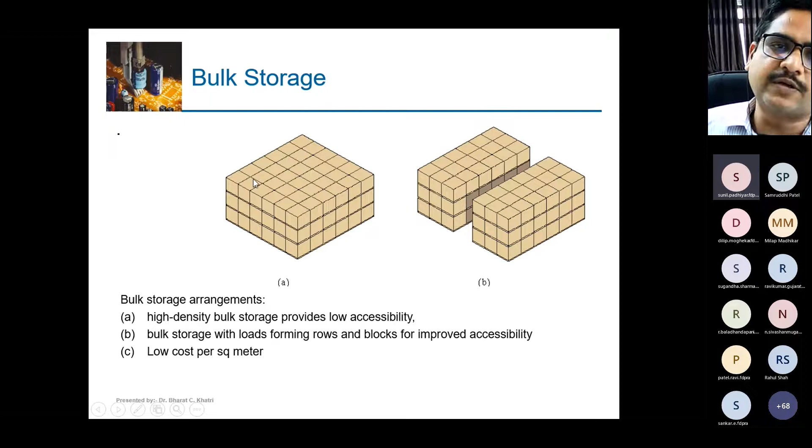Pallet rack system is more widely used in storage systems. Drawer storage is like the cabinet drawer where different files and books are kept in your cabin itself, and it can be used for small items, tools, and parts only.

Now, automated storage and retrieval system, ASRS. It can be defined as a storage system that performs storage and retrieval operations with speed and accuracy under a defined degree of automation. Earlier, things were not automated, so here we require a wide range of automation.

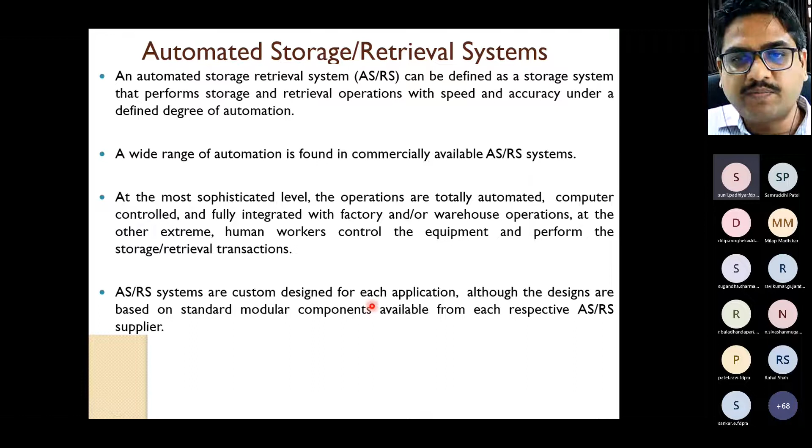A lot of automated ASRS are available in the market. ASRS are sometimes custom design based, or sometimes it's software level, to perform the function of mechanized automated storage equipment, reducing the human resources required to operate the storage facility. It is connected with computer control, and it also has some tagging on itself, so you can easily identify the components in these automated storage and retrieval systems.

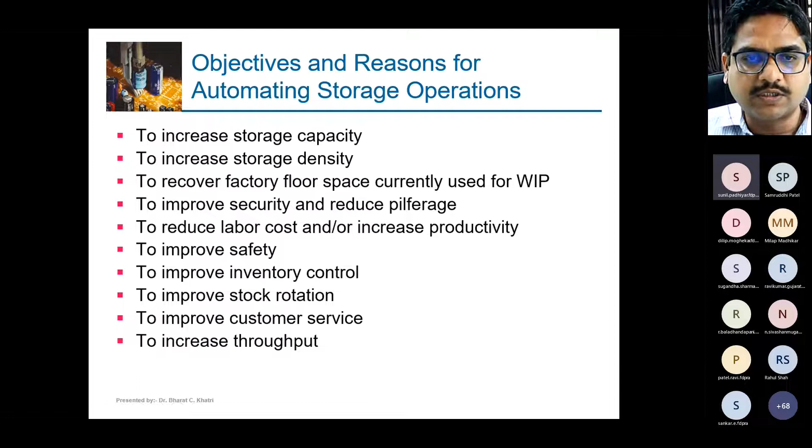Why do we require ASRS? To increase storage capacity, increase storage density, recover factory floor space currently used for WIP, improve security, reduce pilferage, reduce labor cost, improve safety, improve inventory control, improve stock rotation, improve customer service, and increase throughput.

There are two types of automated storage systems: one is the automated storage retrieval system ASRS, and one is the carousel storage system. Carousel storage system you have seen at the airport, the oval conveyor system with bins to contain individual items - that conveyor belt is known as carousel storage, with bins mounted on it. The automated storage and retrieval system is a rack system with a mechanized automated crane to store and retrieve loads - there is already a rack, but it has a mechanized crane or robot that puts things in the rack and also retrieves things from the rack.

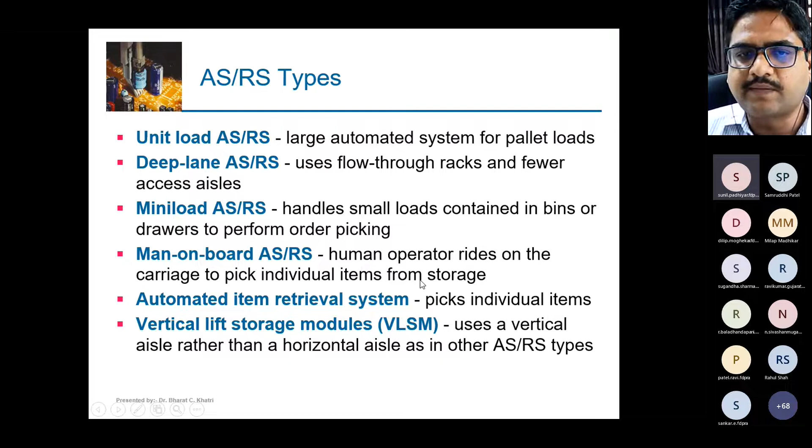There are different types of ASRS systems: unit load ASRS, deep lane ASRS, mini load ASRS, automated item retrieval system, and vertical lift storage modules. Based on the configuration, you can see different types of ASRS. Applications of ASRS include unit load storage and retrieval, order picking, and work in process storage.

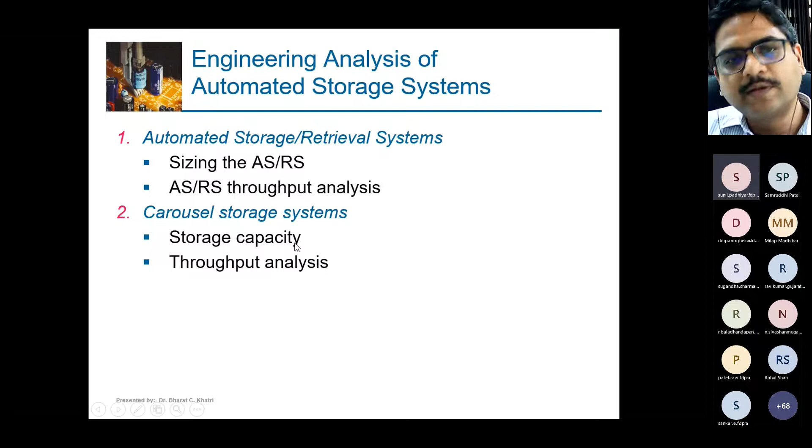If you analyze this, you can do sizing, ASRS and throughput analysis, and carousel storage analysis. The last thing is the computer control system - all things like workstations, material handling systems, and storage systems should be controlled by a central computer.

Nowadays we have big capability computers with higher RAM and more computation capability, which can be interconnected with a number of components. It can simultaneously control traffic, control shuttles, monitor the workpiece being machined inside the CNC machines, and also look at the vision system.

A lot of data comes into the computer, either from the robot, the conveyor belt, the CNC machines, the tool controls, or the workstations. All this data is sent to the central computer, which has software to analyze the signals, and then it gives output signals to each individual workstation, either to the CNC machine or to the robot - telling the robot that the machine tool has completed machining and the job can be taken out from the machine. All this can be done with the central computer.

So nowadays, why we are talking more about automation and robotics or Industry 4.0 - the reason is that we have sufficiently capable computers, as well as good data transfer, whether due to cyber-physical systems or cyber data transfer. So now you can control your systems from far away. If one is sitting in India, he can be capable enough to run a whole power plant in Dubai or Oman. So a whole oil plant can be controlled by sitting in India. That is possible due to 5G data transfer or similar technology.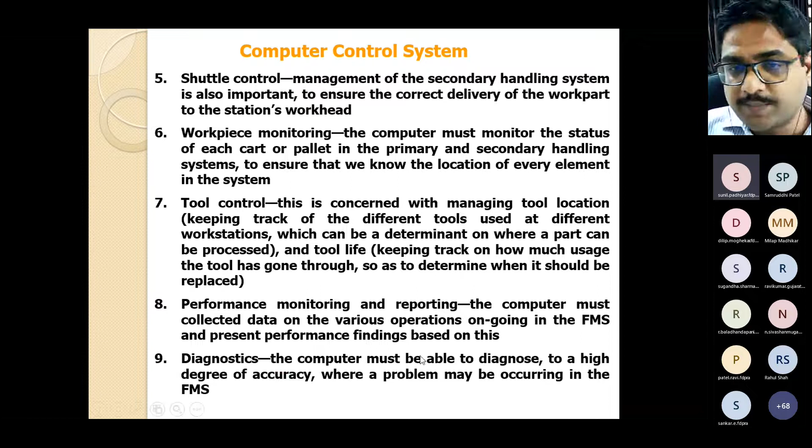Workpiece monitoring is also done with the central computer. Tool control - what type of tools are available in the machine tools - that has to be analyzed also. Performance monitoring - what type of quality you are getting from the machine tools - that also needs to be inspected and fed to the central computer. Diagnostics - if there is some problem or error, that should be diagnosed with the central computer.

So that is done with the help of computers. Now, FMS software - a variety of softwares are available that are compatible with the computer hardware and the machine tools, which interface between the hardware and the central computer system.

So software is the invisible element but essential glue that binds the visible FMS equipment together and forms a system. We have seen the computer visibly, we have seen the machine tools, we have seen the robot, we have seen the other things, but how to integrate all of that, how to run all of that, is done with software only. So many sophisticated computer softwares are made for this.

So generalized softwares are not available for FMS, but sophisticated and highly developed softwares are there for that particular type of FMS only. So specific softwares are used for the FMS.

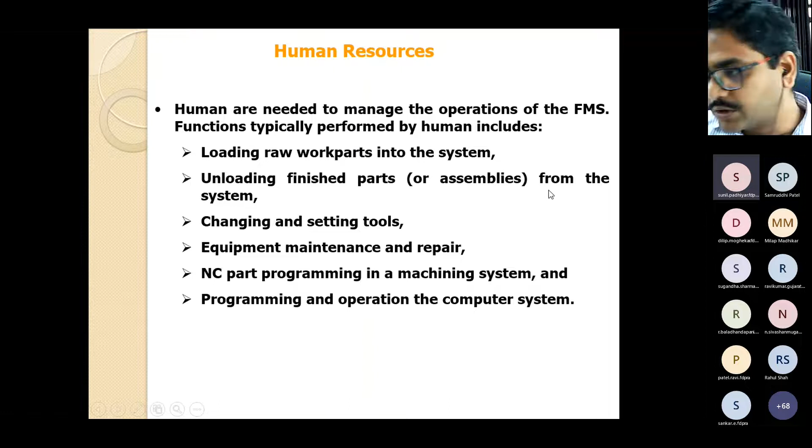The last one is human resource. Human resources are normally required - we cannot eliminate the part of human resource. Human resource may be used sometimes to load the work part, unload the finished goods, change tools, do equipment maintenance and repairs, and some CNC programming or operation of the computer system. All of that can be done with help of human resource. So we can reduce the number of human resources, but we cannot eliminate that.

Something like FMS installation and FMS implementation. During the FMS installation phase, the system must physically be assembled, started, and debugged. Problems and delays are sure to be encountered during this final but critical stage of the project.

So during installation, we have to install each and every workstation and machinery completely and finally. Then you have to interlink between each and every workstation, and finally you can see the whole project at a single phase. FMS implementation involves making all installed components work and function as a system.

Some issues are there during the planning - FMS planning issues. I have mentioned these issues in tabular format. There's part family considerations - how we'll make a family of part processing requirements, what processing requirements are there, and what production volume is required to manufacture in the FMS. These are the planning issues.

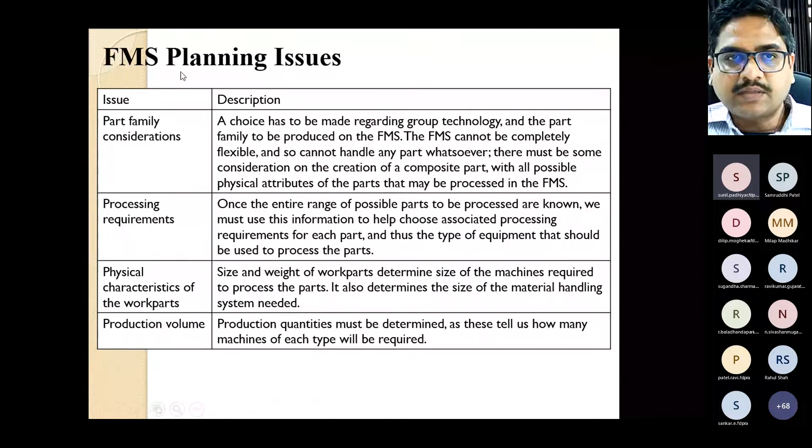Likewise, there are so many design issues - type of workstation required, variation of process routing, material handling system design, work-in-process storage capacity design, tooling, pallet fixtures - all of that you have to come across in the design issue.

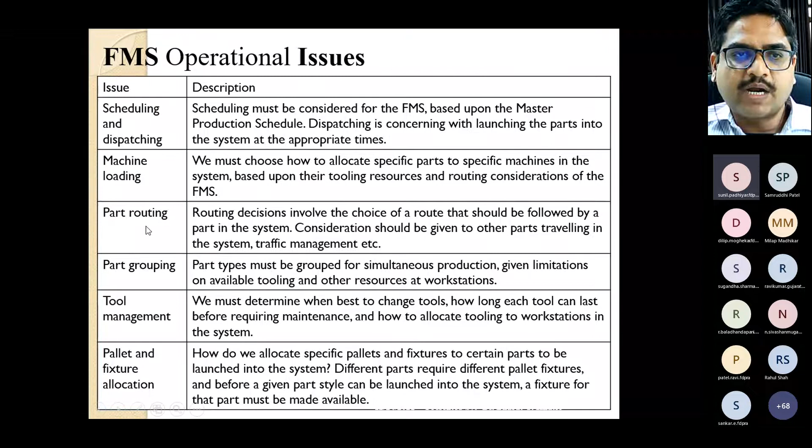Operational issues - scheduling of machineries, part routings, part groupings, tool management, pallet fixture allocation - that will come in the operational issues. We already discussed a lot of advantages of FMS.

It will improve the efficiency, improve product routing, improve product quality, reduce setup time, reduce queue times, reduce time for production completely, and serve a variety of vendors simultaneously. So these are very big things that will give a lot of advantages automatically - produce a variety of items under one roof more quickly.

Second thing, it is automated, so it will give consistent and better quality. Third thing, low cost per unit output is there.

Utilize human work better. Reduce the inventory as there is totally centralized planning, computerized planning, so it will reduce the inventory also. A lot of advantages are there.

Disadvantages are a few. Let's see: limited ability to adapt to change in the product or product mix. Machines have limited capacity. Toolings necessary for products, even of the same family, is not always feasible in the given FMS. We have to take FMS based on the machines. Which type of machines you have, which number of machines you have, that will decide how easily you can go for change in the product or product mix.

Second thing, substantially more pre-planning activity is required. Before setting the button of the FMS, you require to make the planning for that one. You require to purchase the machinery. You require the programming of the machinery. You require the processing sequence to be designed, MRP to be designed. Not all things, but pre-plan activities are required.

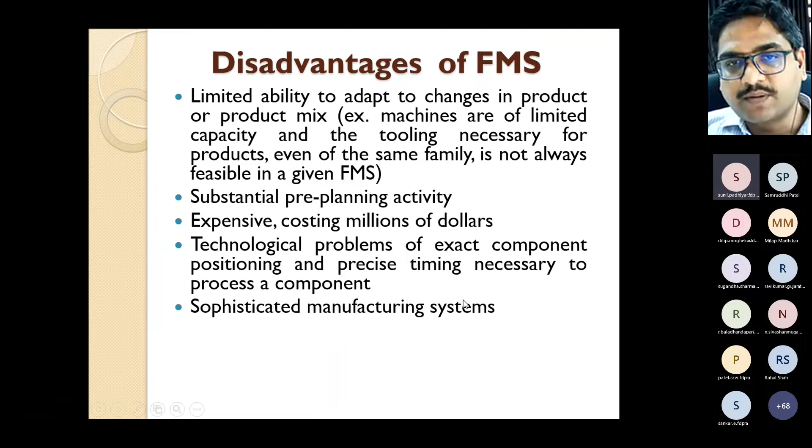So these are the disadvantages for the FMS. It will require a large or huge investment, you can say.

Mainly the limitations of FMS originate from unrealistic expectations as to what FMS is and what it can do, and the misunderstanding about the need for flexibility in manufacturing. Some people understand FMS to mean whatever they think it can produce. That is not like that. So misunderstanding should be removed. It can produce only within a limit of the group.

Flexibility is defined as the ability to respond effectively to changing circumstances. It is not convertibility, meaning the ability to convert from one product type to another product family, volume, or manufacturing expectation. So it is not convertibility. It only produces within a group.

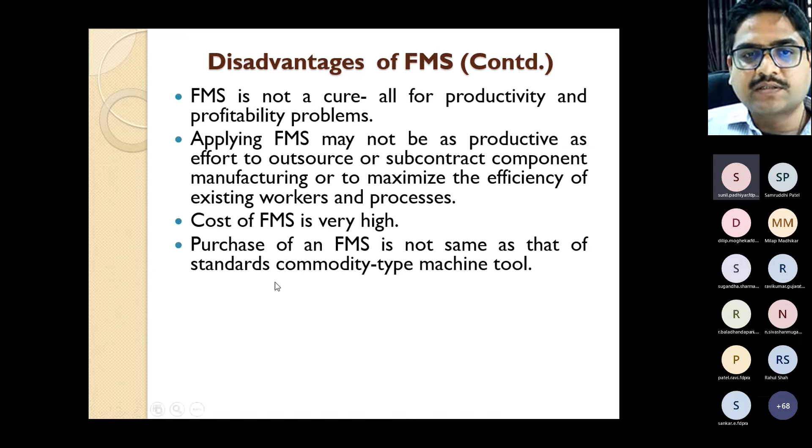FMS is not a cure-all for productivity or profitability problems. Applying FMS may not be as productive as an effort to outsource or subcontract component manufacturing or to maximize efficiency of existing workers or processes. Cost of FMS is very high. Purchase of FMS is not the same as a standard commodity type machine tool. You require to plan for that one.

Applications of FMS include a lot of metal cutting machinery, metal forming machinery, assembly, joining, welding, surface treatment, inspection, and testing. All these things are applications of the FMS.

Challenges with the FMS: first, determining if FMS is the best production system for your company or not, economically and socially - you have to find out whether FMS is best for you or not. Second, possible expansion cost associated with implementing FMS, so when you want to expand your plant, it will also give you a lot of high cost. Day-to-day maintenance of FMS operation is also very critical; you have to focus on that. So these are the challenges with the FMS.

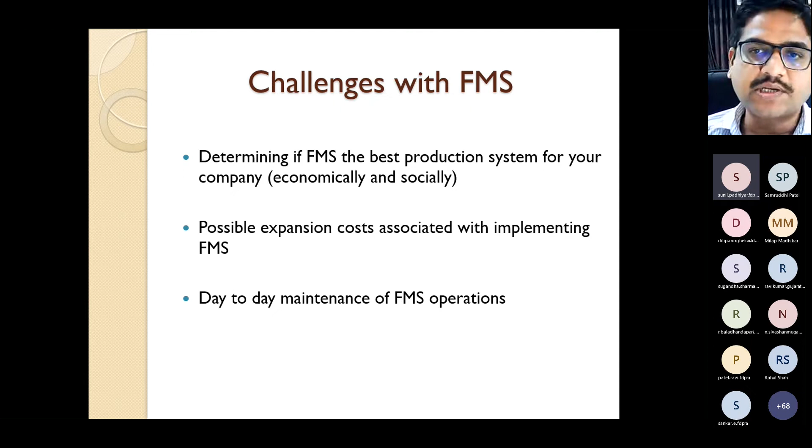So FMS is not something one can easily adopt as technology. It has a big cost involved. It requires to be operated very critically. So mostly big companies are using FMS technologies and getting the benefits of it, as it requires a bigger capital investment.

So I tried my level best to explain what is FMS, how it is related to automation and robotics, and what are the applications and limitations, and what is the technology. So any question from your side?